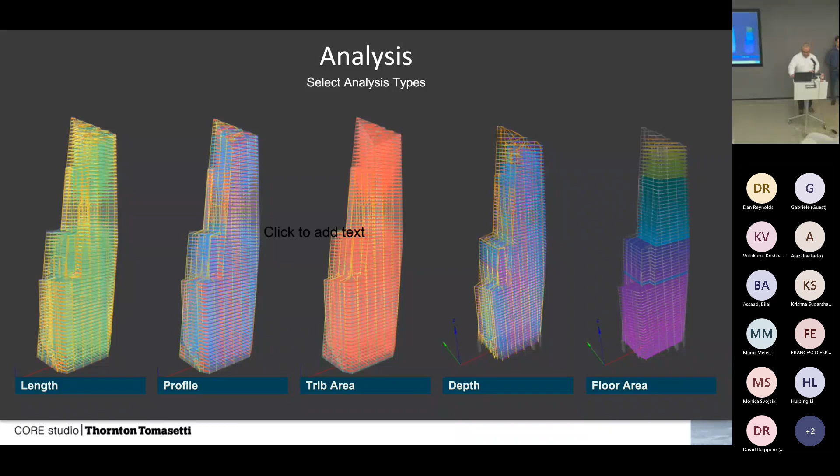So to show that it's actually real, this app called testfit.io, which is commercial software doing generative planning for residential buildings, is using our machine learning model for their column predictions.

So, I think it's really interesting because the tech sector is really looking for these things, this type of analysis. So it's doing the sizing sort of on the fly, which I think is really interesting.

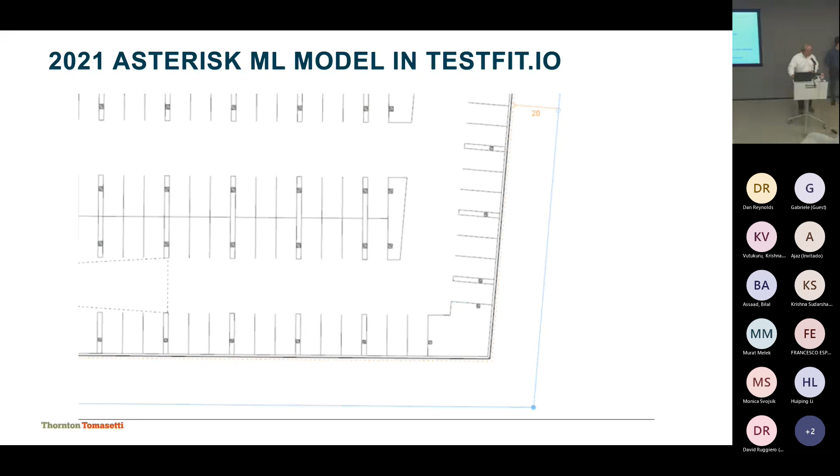So some of the pros and cons of the app, and this was important for us because with any R&D, you need to either fail fast, as you've heard, or at a minimum learn the mistakes that you made and how you can improve on those things. So I would say back in 2018, machine learning and automated design was probably too much too fast for most of the industry, and for even Thornton Tomasetti or anywhere, I should say. Now people are dying for it, but back then it was not trusted.

It's very black box, so you didn't know where the data came from necessarily, and predictions were close, but no one's going to go through 1,000 elements and check every single one. The other thing, asterisk, was it was for a single building typology, so a tall building with a central core. Data sets were code based, so the results are actually too low.

There's not a building on the planet that is designed with every element with a design capacity ratio of like 0.99. Forget it. Most buildings are designed 20 to 30% over code base, for drift purposes, for other reasons, I should say. So the total results always ended up being a little bit too low. So that's where we need to layer in the experience part to make sure that, or at least have a way to increase those values so that it's more real.

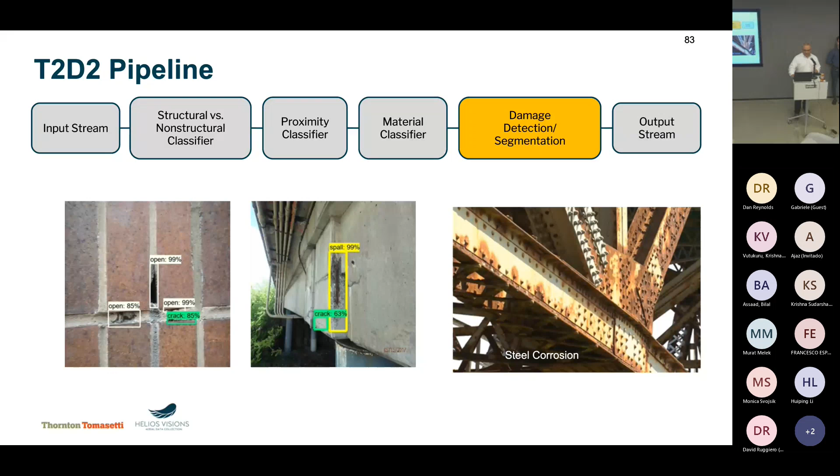But the beauty of this is it can do it at enormous scale as compared to a person. So again, it's a complex app. When it does predict the wrong thing, or something that is not a crack and needs to be something else, it does have a way where the human can manually correct it, like a child essentially. And then all of a sudden it learns, it gets smarter and smarter along the way.

So this is a quick video doing a stucco building in Florida. And you can capture these damages just using a drone. And each one of those little boxes is being captured and categorized, classified, and put in a database so that it can be retrieved later and quantified. So again, what it's doing there is probably weeks of time for a person to do. So that's sort of the power of what machine learning could do in a project.

I'm going to go through this quickly, but this was also a little hack project that we worked on. If you're not familiar with Konstru, we created an app called Konstru, which is a data interoperability platform mainly for structural engineers. It's a centralized database model; I refer to it as like Google Translate for BIM. And it talks to all these different platforms seamlessly, bidirectionally.

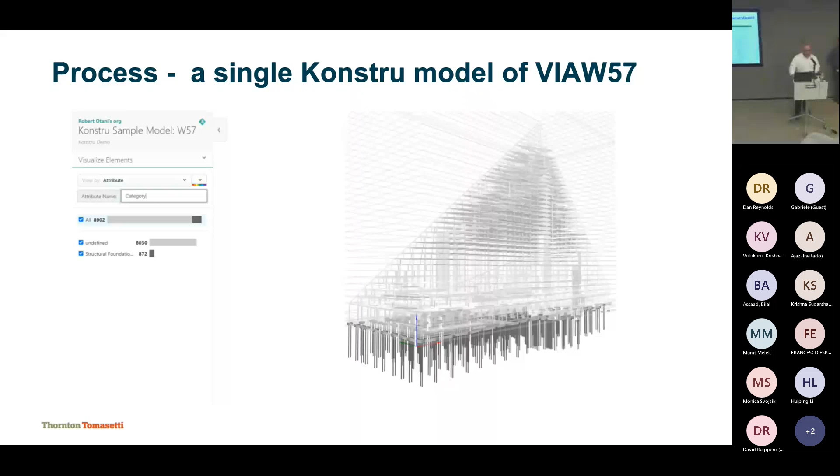But so the question is, and this is like a $1 million question, right? Can you use BIM models for machine learning or to train models? Because it is good data. We have a lot of it. So we decided to take just one building. We were the engineer for the VIA West 57 building on West 57th Street, New York City, with Bjarke Ingels Group. And so what I wanted to do was just predict a column size for that particular building using machine learning.

Konstru allows you to export all of the BIM data within the model into an Excel spreadsheet, which is easy for me. That's the level of tech that I can handle. And I was able to parse each one of those columns into a data set where the only inputs were two things: the size of the column and the number of columns above. Most experienced engineers can tell you with some reasonable accuracy, without doing a single calculation, what a column size should be for a 40-story building. No calculations at all. So the question is, can you put that into code, into a machine learning model? And I'm going to say the answer is yes.

So I was able to create unique IDs for each one of these columns, calculate from the model the number of columns above, the levels above, and this is just a picture of the model colored by column size. Even just looking at the column sizes and the colors, you can start to see some patterns, right? All the top columns are the same size. Why? Because they have very little load, so they're the minimum column size. The ones at the bottom, within the very big massing, are way bigger and different colors.

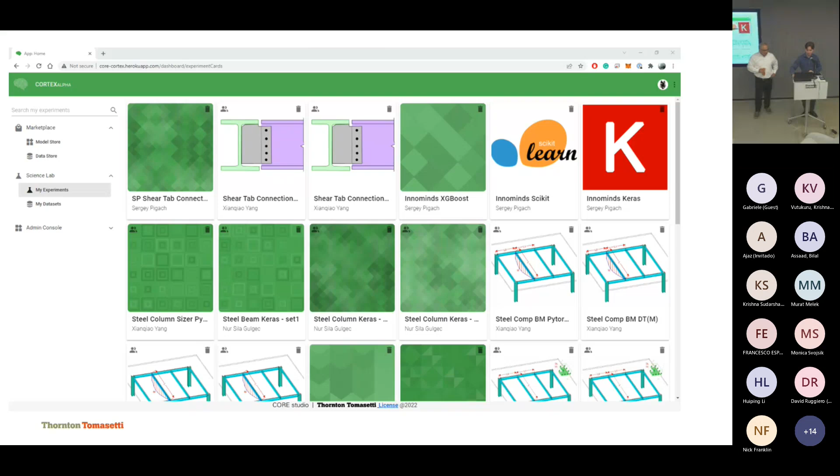So this is what Cortex looks like. We have what we call experiments. We're kind of stealing nomenclature from what's currently standard in the data science field. So within each experiment, you're able to log a number of runs.

So we actually wrote our own Python library, Cortex Python library, that allows you to take a machine learning model from a number of popular libraries with support: PyTorch, XGBoost, scikit-learn, and TensorFlow Keras. And you can just call a log model function, and it's going to take your trained model and serialize it to disk and push it to the cloud alongside all of the metadata, all of the information about who developed this model, who trained it, what data set it was trained on, what are the hyperparameters, what are the metrics, and so on and so forth.

And then we're also able to deploy those machine learning models as APIs. And we also have a data store, so you keep your machine learning models and data sets in the same place. You're no longer searching for CSV spreadsheets across different GitHub repos and folders on your hard drive.

And this is just a view of, you're actually able to query those data sets regardless of the size through the web app. And so by using Cortex and by bringing the data and the machine learning models and the ability to quickly press a button and create a web API that the development team can use, we hope to bring some structure to this chaos.

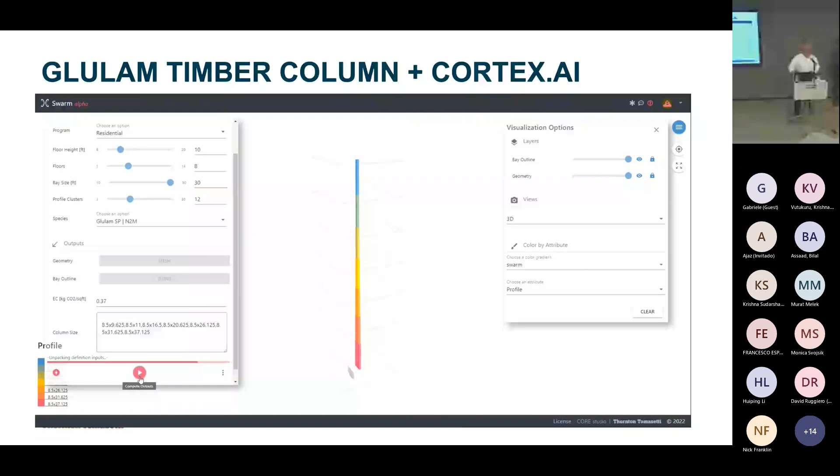So, tell me some engineer that can design columns this fast, on the fly. And this is the power of machine learning, where you are embedding answers in an algorithm. This is a Chevron concentric brace frame where we are designing members on the fly. Each one of these probably takes the best engineer 4 to 8 hours, and we can compute this in probably under 30 seconds each version.

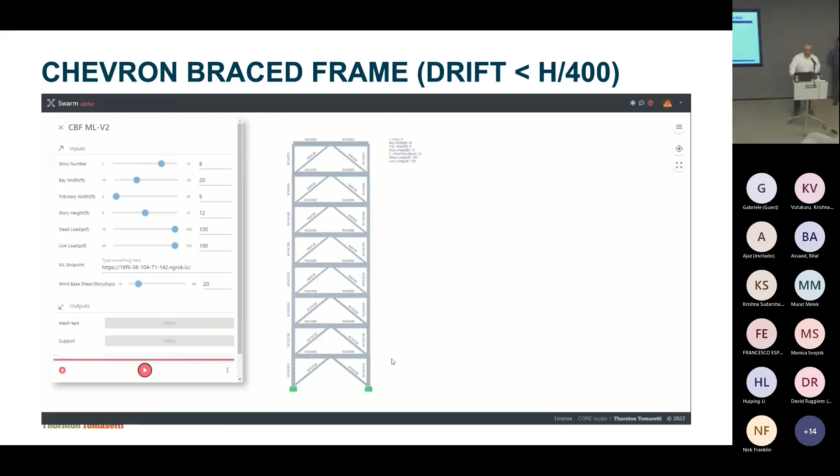So when you're doing a tall building design, the first thing you have to do is calculate the lateral system. It takes a long time, but we're hoping to do this in hours versus days, or weeks versus months, let's just say.

This is the most recent version of our Bay design. And as I mentioned, Skipper in the beginning was a trusted data set, so we were using the Skipper data set for Bay design. Skipper looks very simple, but it's actually very complex. It designs 8 different bay types, depending on corner, location, number of bays in the X and Y direction, if you're engineers, you know what I'm referring to. And this one's calculating office loading type vibration criteria.

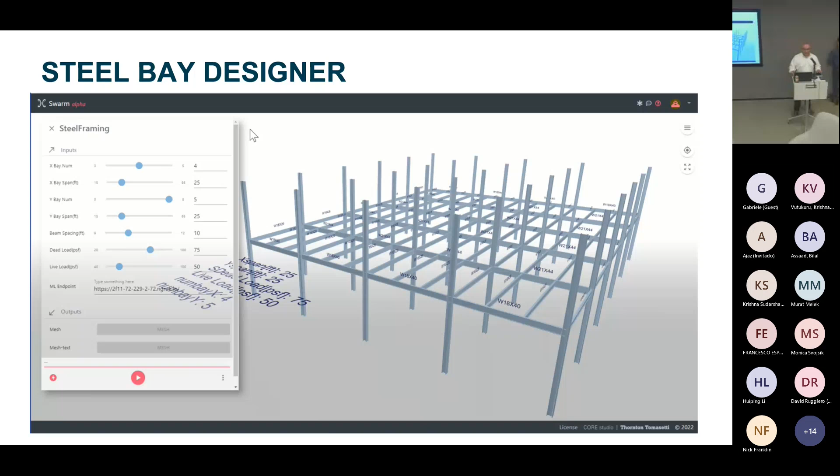And we sort of held certain things constant, but this just demonstrates what can be done. So this is doing a vibration design and strength design all at the same time on the fly. And you can see how it sort of looks from a color standpoint. So it's starting to look very, very correct. And this is, again, many, many times faster than what a person could do, or any other software.

This is an example of a project that we're working on, doing a steel building, concrete building, and a timber building all at the same time, using both machine learning and also some other basically rule-based calculations. We are using the asterisk 1 machine learning model for the steel and the concrete building, calculating embodied carbon as well. At the same time, we're using an algorithm to calculate the foundation type. And it's a very interesting study.

There are things that we discovered in doing this analysis, because timber is typically half the weight of concrete or even less. And that is very interesting. And you can see the columns change in size. Timber column sizes get very, very large for a tall building. So that's also a design aesthetic constraint, I would say. But this is what's possible.

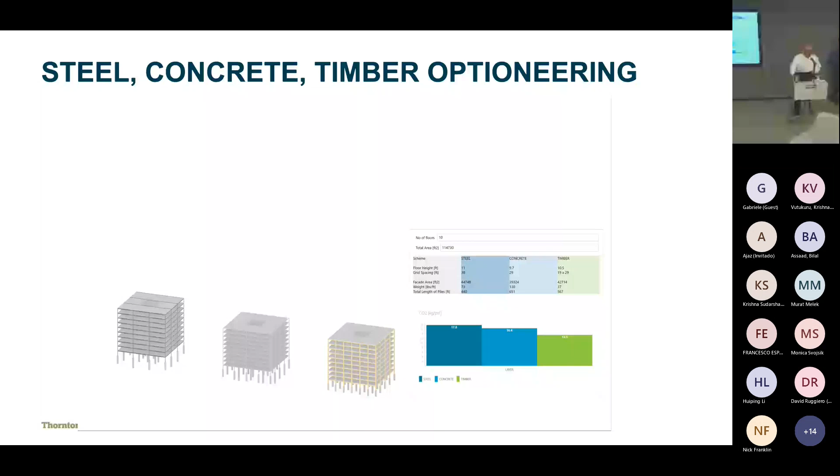And this is what we want to do in those early design phases, to get the designers and the architects able to make the decisions really quickly without having to go back and figure something out. So this is just a case study. I'm going to flip through this pretty quickly because we're running out of time, but this original presentation was given at the NASCC Steel Conference in Denver. And so we decided to create, again, using our encoded core structure library, where we have a bunch of tools doing Tekla automations and trusted tools.

And again, is this going to work? Let's see. Put my mouse. Let me see. Yeah, go ahead. I can't even see them. In a moment. Oh, you have to actually click the button.

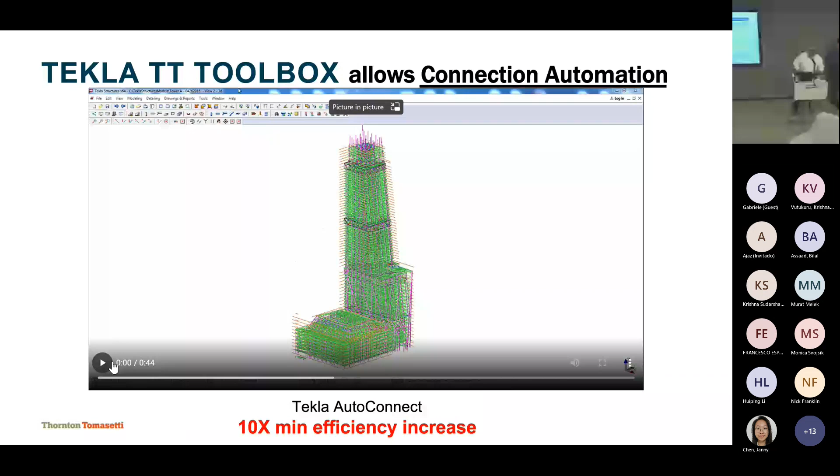Yeah, there you go. Okay, so this is 30 Hudson Yards, showing a floor in Tekla. We have the shears embedded in the model, and what it is doing is populating all the shear connections on the fly, using our automation tool that we've created over the years. And so again, this is fabrication-ready design intelligence.

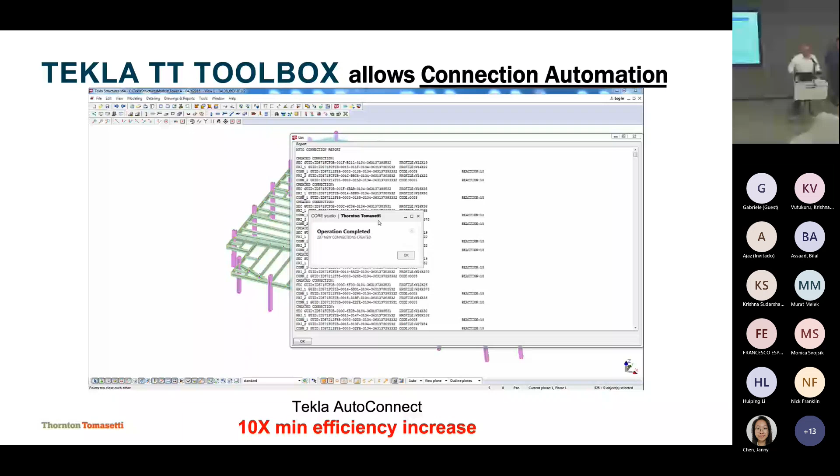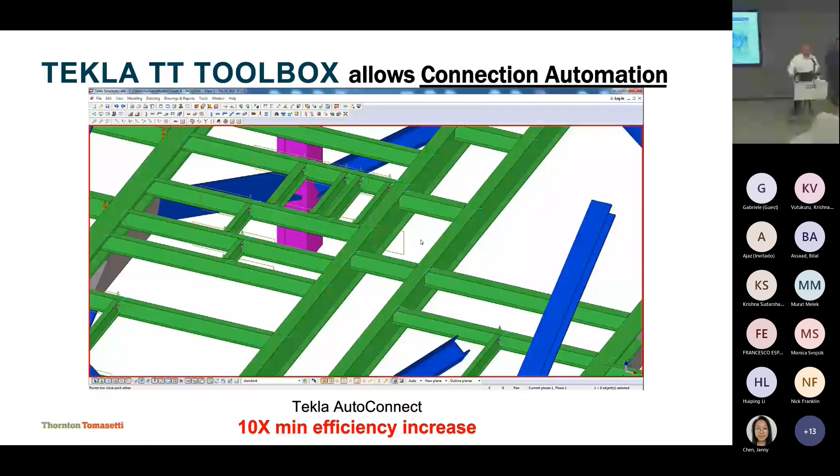And again, each one of these connections takes an engineer, the best Tekla detailers, about 10 minutes to do. So we're doing 230-plus connections in under a minute. So that's the power of automation. And so what we decided to do is use that data set to calculate connection weights for a particular building.

Nope. Should be this one, right? Is it moving? Okay, well, so unfortunately,

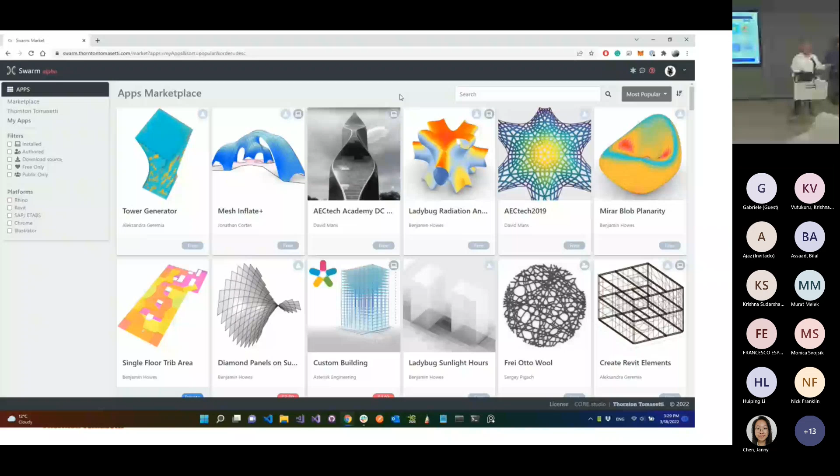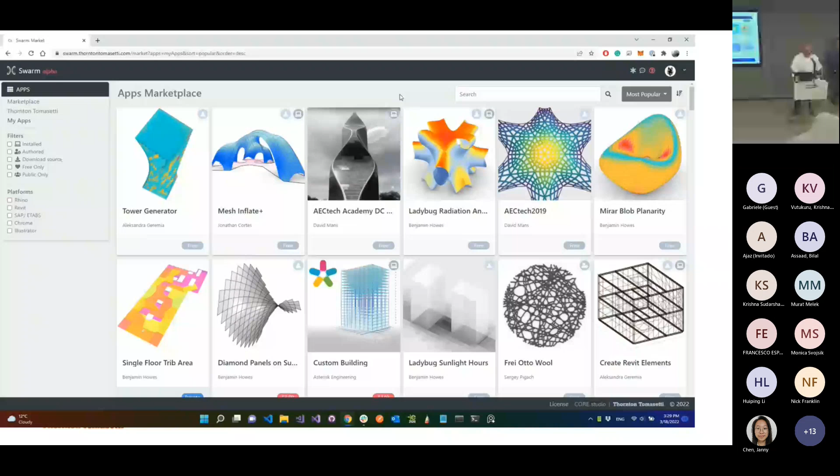So there is an ROI, obviously, for all of this stuff, but it's hard. Machine learning, we've been doing this for years now. There's a lot to do and learn about machine learning creation. It takes a lot of resources, we found. But again, we think that there is a significant return on investment if we do this.

That's why this is really hard. You blow up any computer that you have. So we have to use our experience and also use the data science expertise to get close enough without having to do this. So what do I think in summary? I think 30 to 40% of what we do can be automated. And I don't mean 30 to 40% of a certain process. I mean 30 to 40% of a total project.